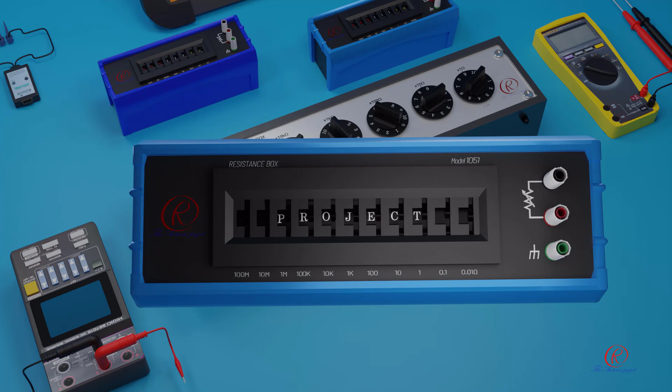The Antonio Project presents: automation, unboxing decade resistance box and how to use.

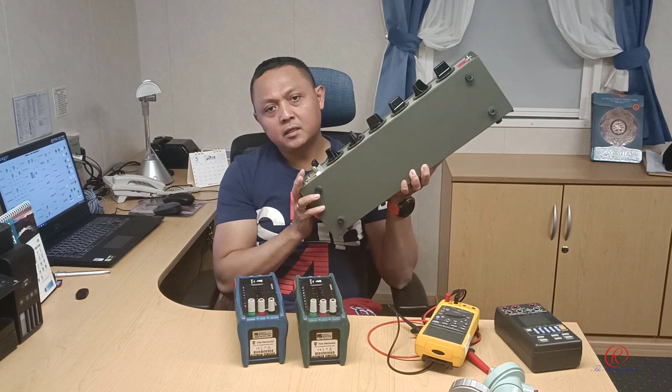What are the uses of this decade resistance box? It can be used to calibrate an RTD transmitter, like this RTD transmitter. Then to calibrate an insulation tester, to calibrate a resistivity meter, to verify or calibrate a simple ohmmeter or multimeter. And another is to calibrate a conductivity meter.

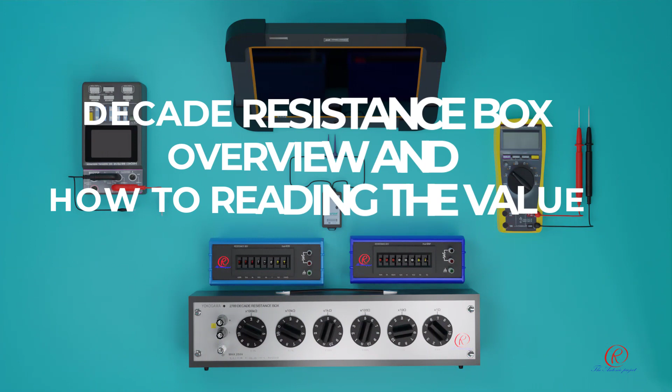How to use this decade resistance box? Let's check out the following video. Let's go. Decade resistance box overview and how to read the value.

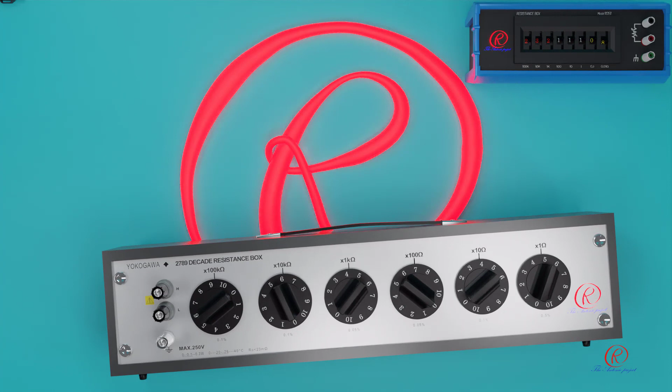A decade resistance box is a handy tool for electricians or engineers. It allows you to measure the resistance of various electrical components and create different resistances for multiple purposes. Following are a few models of resistance box.

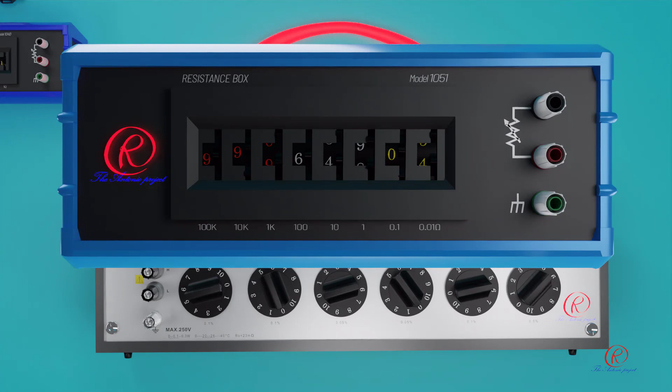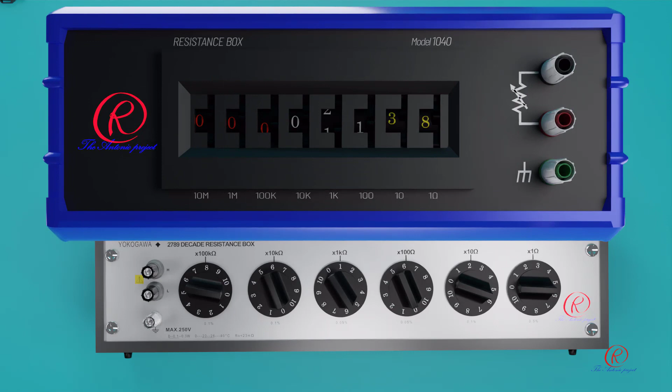This model is made by Time Electronics with a range from 0.01 ohm to 100 kilohm. Next model, the maker is also Time Electronics, with a range from 1 ohm to 10 megaohm. Another maker is Yokogawa, with a range of 1 ohm to 100 kilohm.

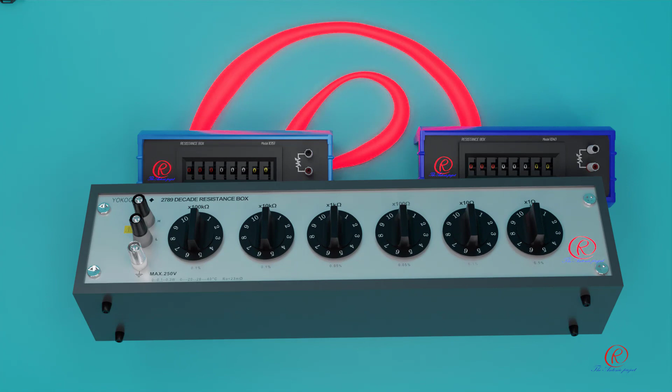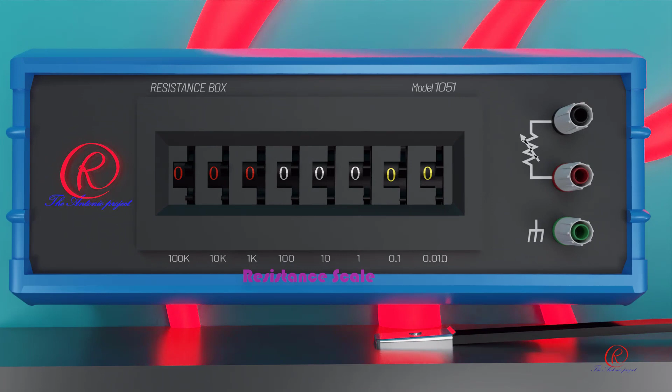The resistance scale is located below the numbering of the resistance box. The rotary selector switch is located in the middle of the resistance box. It is used for selecting the resistance value as required. There are 8 selector switches, where each switch has 10 numbers from 0 to 9.

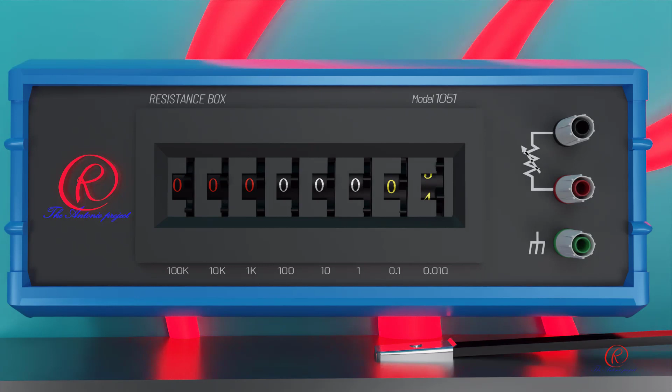When the first selector switch is scrolled to number 7, it means the value is 7 multiplied by the scale 0.01 ohm, equal to 0.07 ohm. When the next selector switch is scrolled to number 8, the value is equal to 0.8 ohm. To read the resistance box value, every selected number on the selector switch is multiplied by the scale below the selected number.

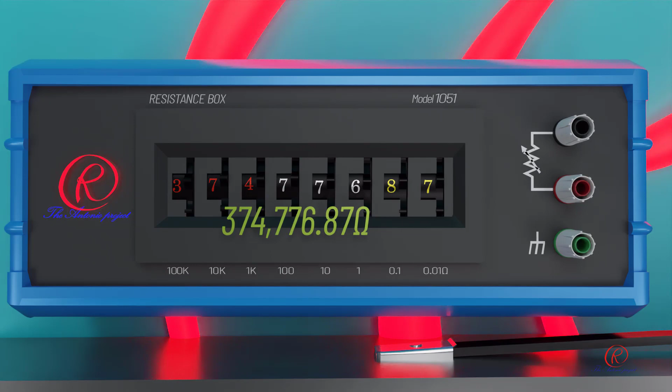Currently, the value of the resistance box is 374 kilo 776.87 ohm. For the Yokogawa resistance box, to read the value, the selected number is multiplied by the scale located above the selector switch. Currently, the value is 225 kilo 537 ohm.

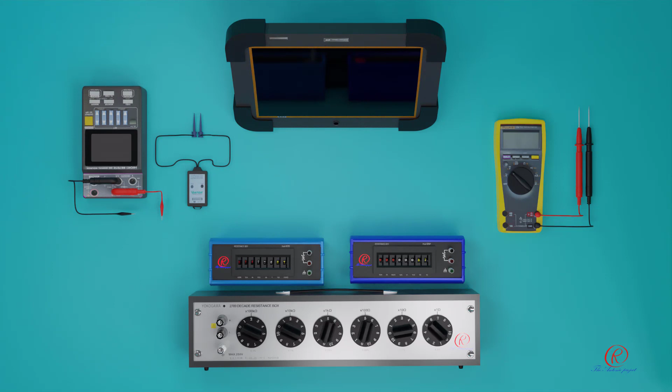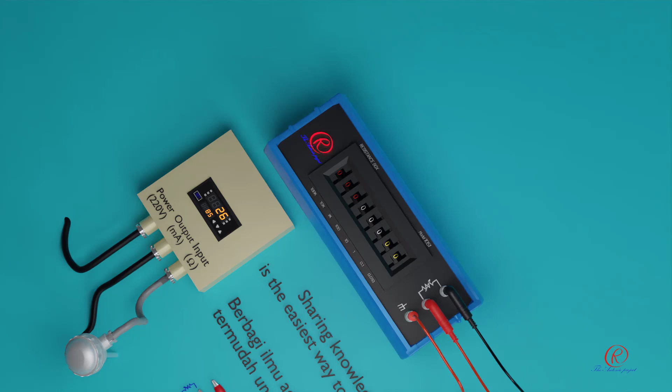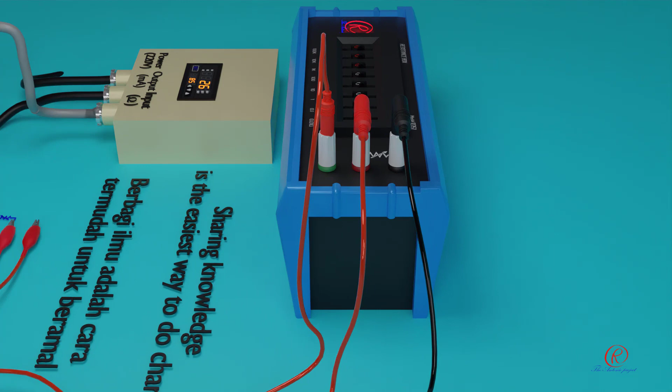Connection of resistance box to temperature controller. Decade resistance boxes are commonly used for RTD PT100 or PT1000 simulation to calibrate RTD transmitters and resistance temperature devices. Following is how to connect the cables from the resistance box to the temperature controller.

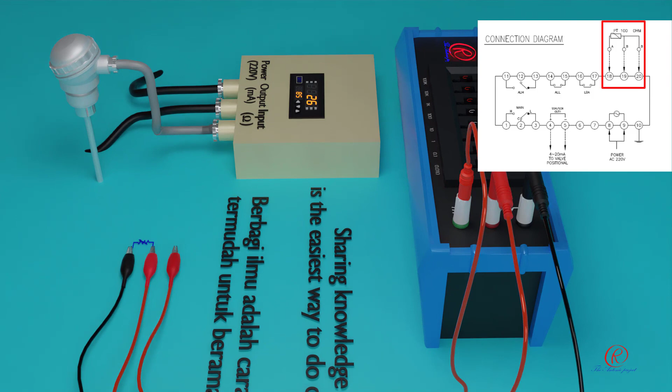Prepare at least 2 or 3 extension cables. Then plug the male plug or banana plug into the resistance box terminal female plug. Check the temperature controller wiring. Make sure of the type of RTD sensor, whether PT100 or PT1000 type. Also the RTD terminal number, whether it is using 2, 3 or 4 wires.

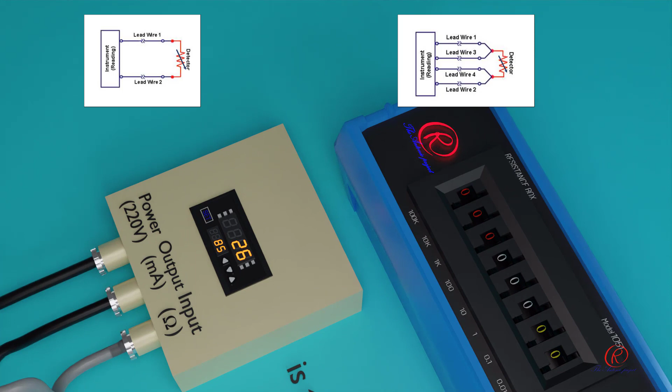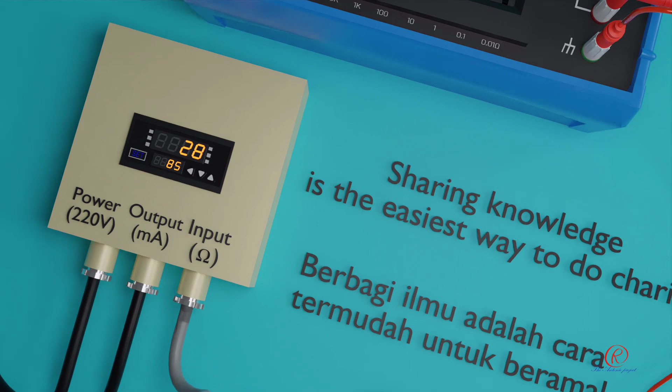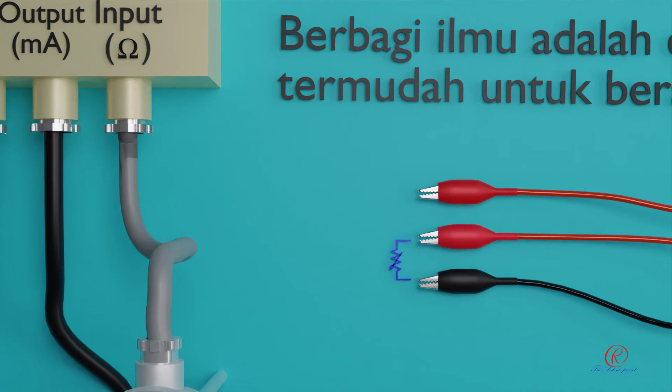Commonly, RTD sensors use 3 lead wires. This makes 3-wire RTDs more accurate than their 2-wire counterparts, but less accurate than the 4-wire configuration. Make sure during connection that cables marked with the variable resistance symbol are connected to the terminal cable with the same symbol for the temperature controller and resistance box.

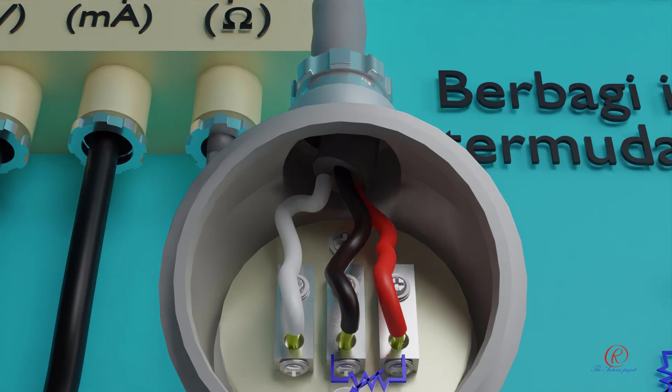Disconnect 3 cables from the RTD sensor whose working performance is in question. Don't forget the marking on the cables by their colors or by numbering.

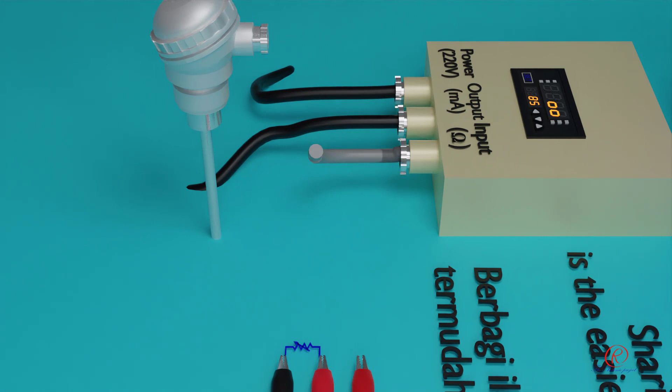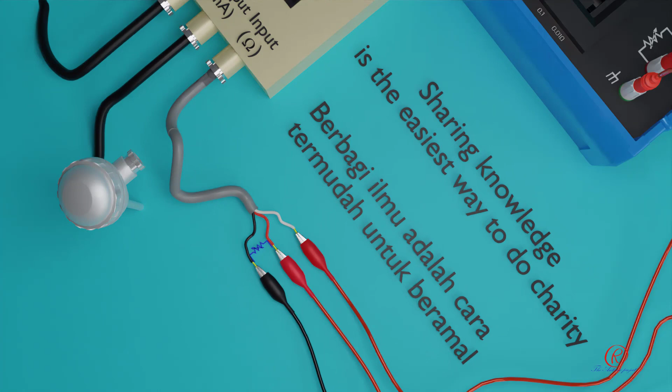Then connect the cables which have been disconnected from the RTD sensor to the resistance box extension cables, in the same order as the cable color code and the variable resistor symbol marked on the resistance box. When the cable connection has been set up, you can start to carry out troubleshooting.

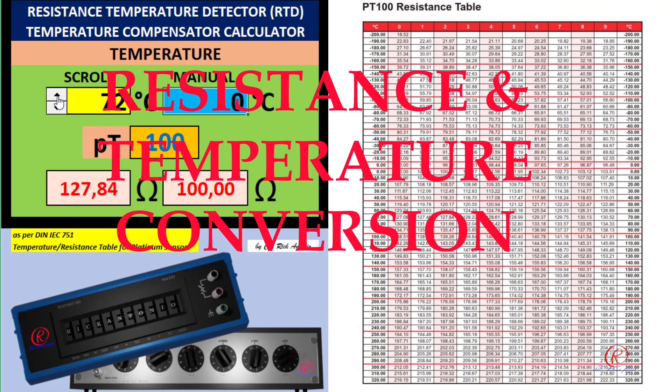Resistance and temperature conversion. I have created an automatic compensator calculator program to calculate conversion between temperature and resistance in Excel.

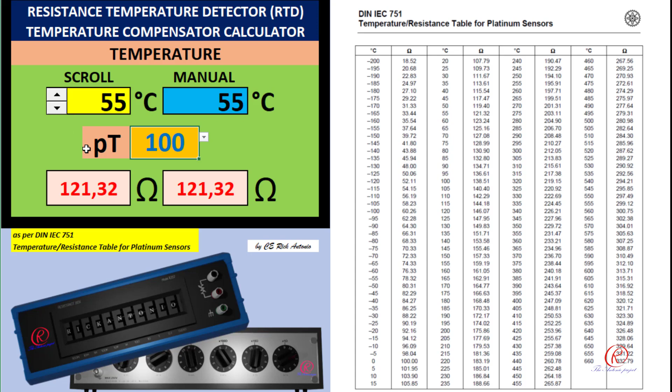Troubleshooting of freshwater generator heating temperature fluctuation.

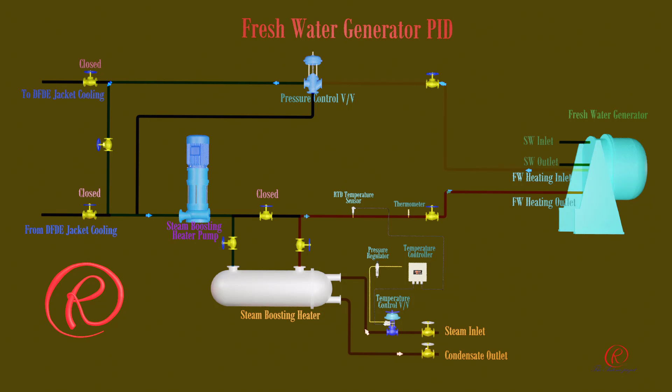On board a vessel, many system controls use PT100 RTD sensor for temperature controlling. RTD sensor picks up the measured temperature by converting temperature to ohm. Then the signal is sent to the temperature controller to be converted to milliampere. The milliampere signal is then sent to the positioner, where it is converted to air pressure to regulate the control valve.

Opening or closing. This is a 3-lead PT100 RTD sensor for picking up temperature from the piping system. Temperature is then converted to ohm. PT100 means the sensor is made from platinum and the resistance of 100 ohm equals temperature of 0 degrees Celsius.

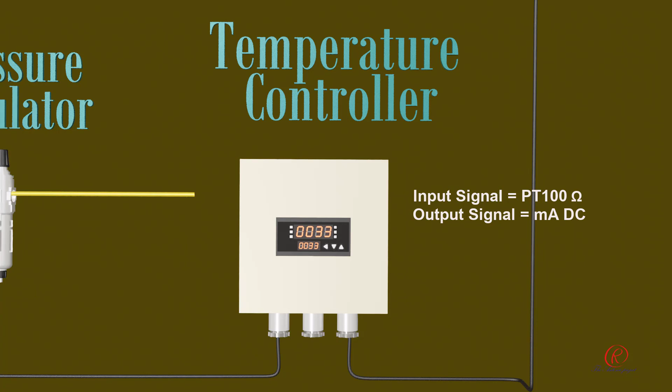The temperature controller converts the signal from ohm to DC milliampere, then calculates and sets up the output based on the setting value.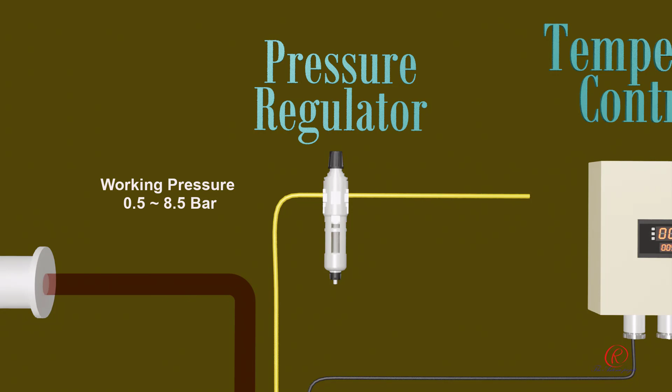Pressure regulator to regulate input pressure of control air. Temperature control valve consists of a positioner to convert DC milliampere signal to pressure, an actuator to operate the valve for opening and closing by air pressure sent from the positioner, and a valve to regulate the amount of incoming fluid, gas, or steam.

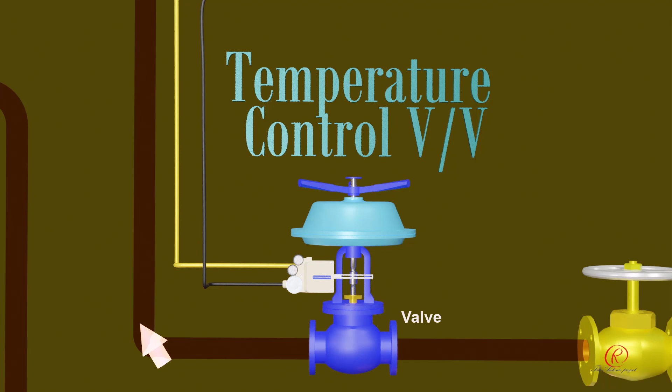Steam boosting heater acts as a heat transfer place from steam to fresh water. The steam boosting heater pump circulates heated water from the steam boosting heater to the freshwater generator.

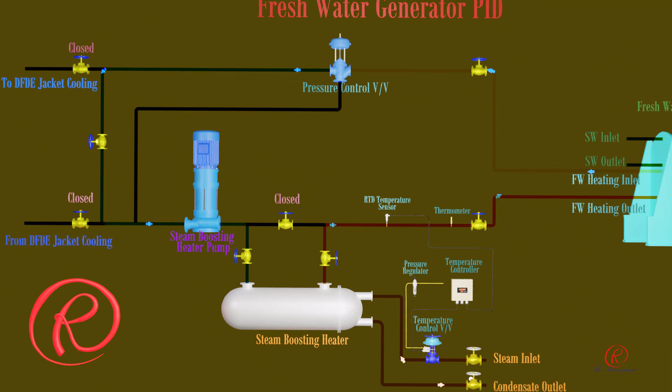This freshwater generator PID shows the automation of the freshwater generator jacket water heating system. Jacket water heating is a closed system, and temperature is to be maintained at about 85 degrees Celsius by the temperature control valve.

Heat transfer takes place at two locations: the steam boosting heater, to increase jacket water temperature, and the freshwater generator heating chamber, to evaporate seawater.

In case the temperature control system fails, freshwater production will decrease. Therefore, it is necessary to carry out troubleshooting when fluctuation of heated jacket water temperature occurs.

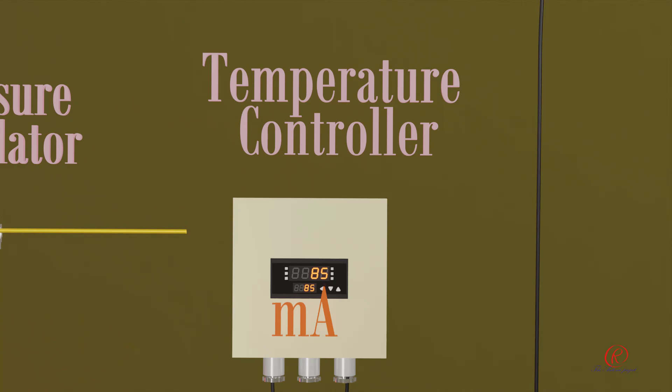RTD sensor picks up temperature from the piping line and converts it to resistance. Resistance signal is received by the temperature controller and converted to DC milliampere. Signal is continuously transferred from sensor to temperature controller.

Once something is wrong with the RTD sensor, it will influence others. Therefore, the sensor is the first priority to be investigated when an abnormal condition occurs in the control system.

The temperature controller is the brain of the control system. It receives input, calculates, and processes the signal to desired control output.

As you can see on the display, the temperature is fluctuating, ranging from 73 degrees Celsius to 90 degrees Celsius. Meanwhile, the setting value is 85 degrees Celsius. This condition is considered abnormal.

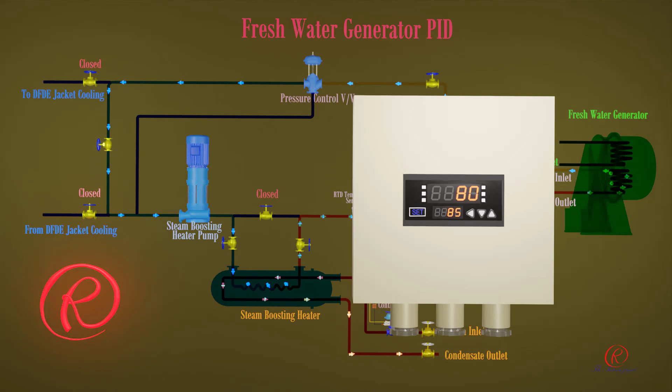Investigation will start with the RTD sensor. If the sensor is in good condition, the next step is checking the positioner and then the control valve.

In order to check the condition of the RTD sensor, it is required to use a decade resistance box to give a dummy resistance signal to the temperature controller. Set up the resistance box as the previous step, then scroll the selector switch to set up temperature as required.

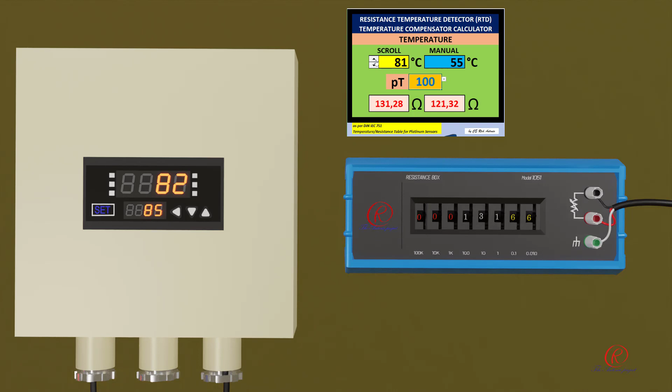When the resistance box is set to 131.66 ohm, temperature indicates 82 degrees Celsius. When resistance increases to 132.80 ohm, temperature indicates 85 degrees Celsius. It means the correct value is received by the temperature controller.

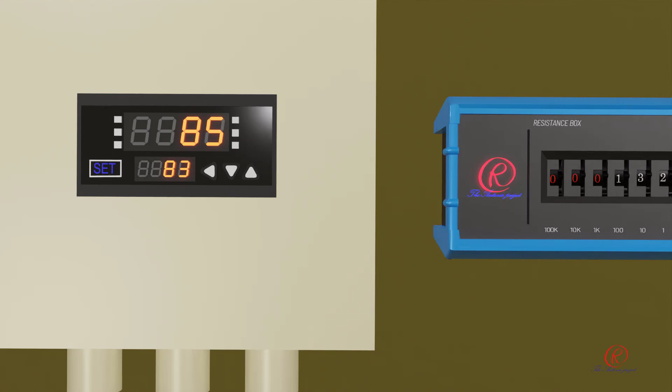Next step is reducing the setting value or SP to 83 degrees Celsius, below the output of 85 degrees Celsius, to find the response from the control valve. Observe that the control valve is closing. It means that the control valve response is correct.

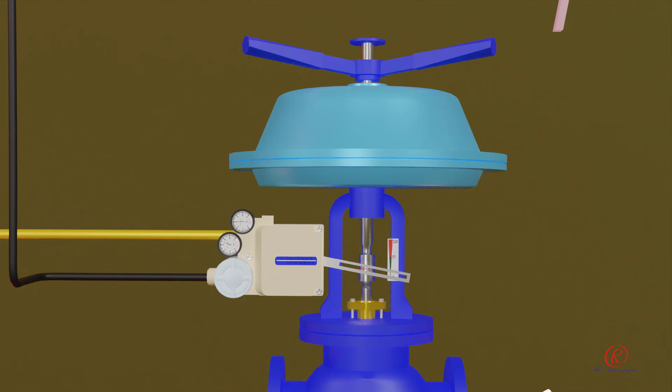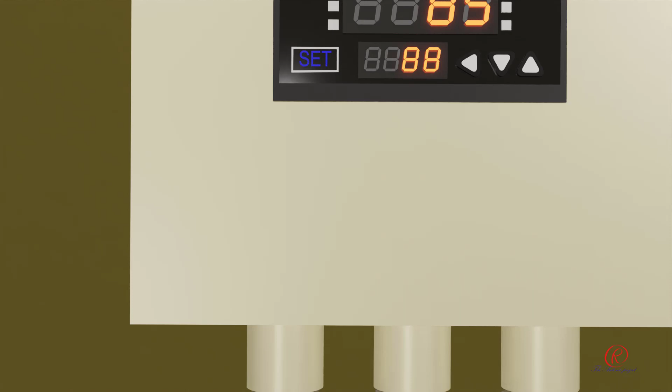Next, increasing the setting value to 88 degrees Celsius, above the output of 85 degrees Celsius. The control valve is opening, giving a good response.

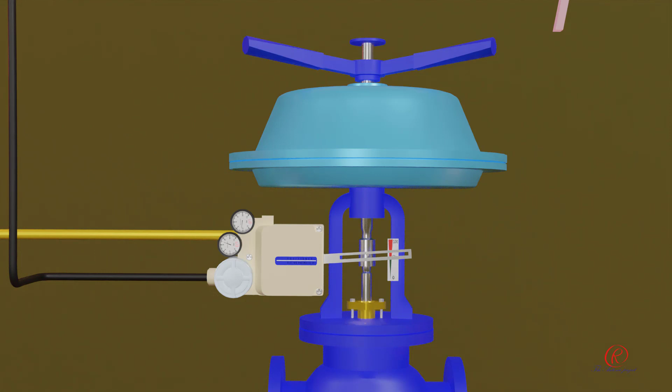Next step is returning the setting value to 85 degrees Celsius, the same as the output of 85 degrees Celsius. The control valve closes to about 50%. In this condition, the temperature control valve is considered to be in good condition. It means the trouble is caused by malfunction of the RTD sensor.

Actual troubleshooting of freshwater generator jacket water temperature fluctuation. Preparation of the decade resistance box.

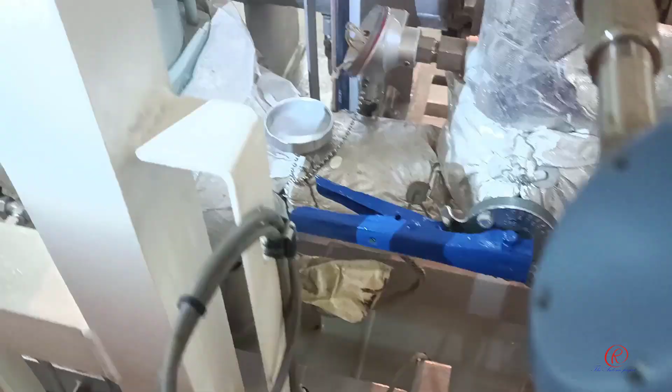Disconnection of RTD sensor cables.

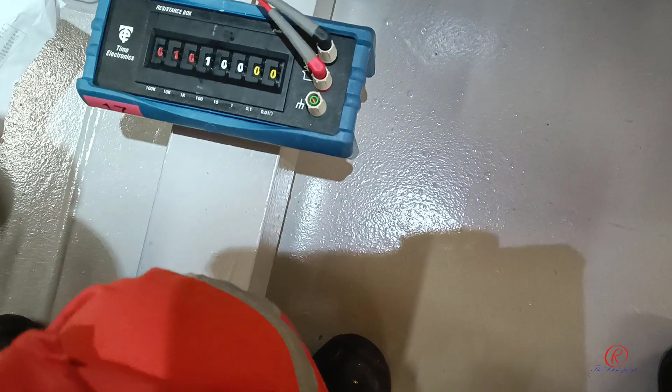Setting resistance value to the resistance box.

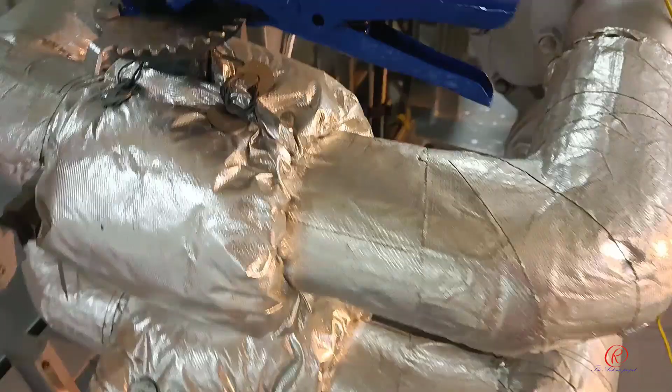Checking the value on the temperature controller.

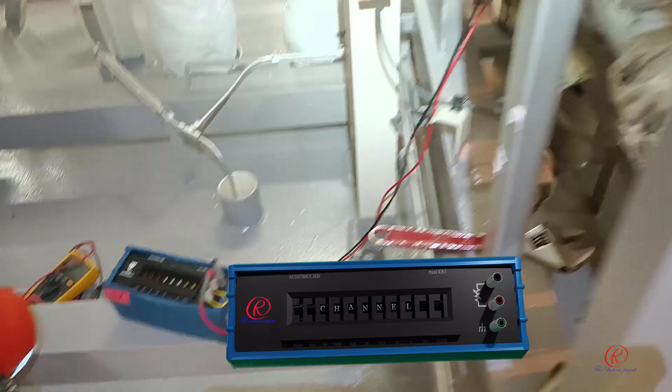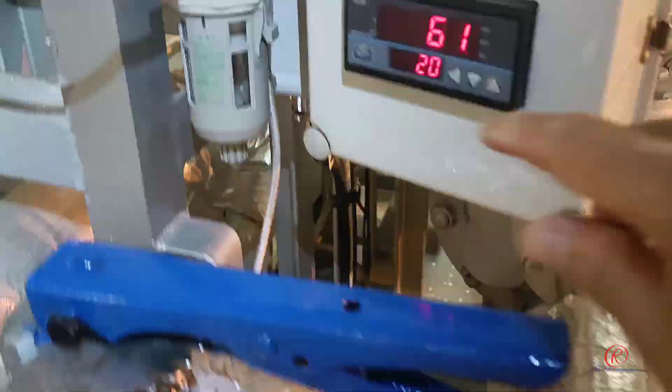Operation of setting value or SV by increasing and decreasing.

Confirmation of control valve using 4 to 20 mA DC signal injection.

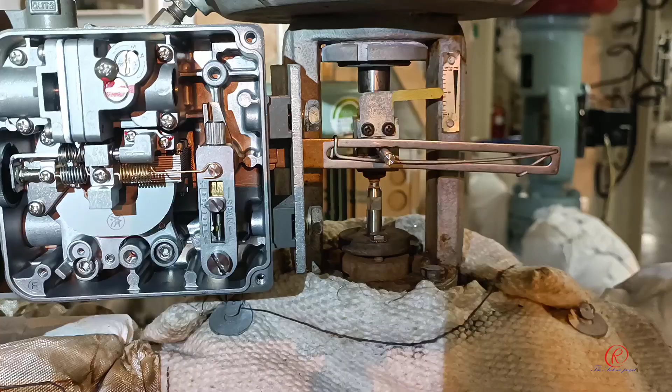After the investigation was completed, it was found that the RTD sensor was defective and necessary to be renewed.